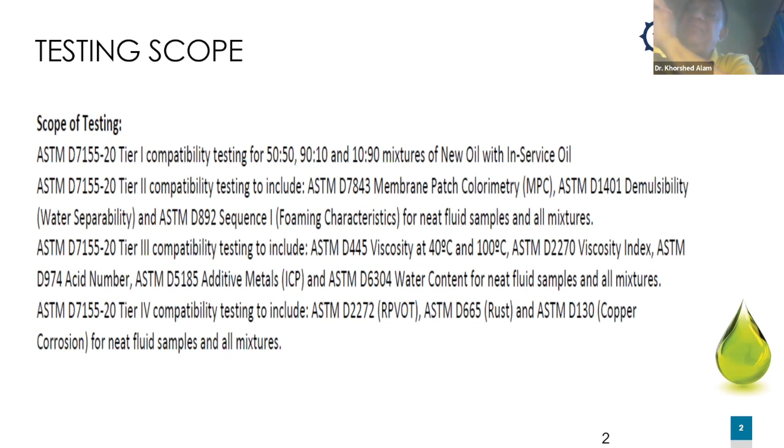When you talk about compatibility, another thing comes in: what is the ratio like? One lube oil with another, is it 50-50, 90-10 or 10-90? You could do 70-30 or 30-70, but the standard ones are 50-50, 90-10, 10-90. One tells you how a little addition behaves, the other how half behaves. For each test we did these ratios for new and in-service oil, and you'll see what we tested in subsequent slides.

So let me put it up front: at what level of compatibility do you want to test? Should the scrutiny be the highest, or just bearable, acceptable? So we need different tier levels. If you go up to tier 1 testing, you'll get one answer. Then do you want to go further, tier 2, 3, 4, 5? Different characteristics come in, and we see compatibility against those. So let's talk about tier 1.

So tier 1, when you do this compatibility test, and then how you do it, the preparation, just like any other, even a university lab, where I also came from. So you have the processing of your sample, right? So how you do it. One is by heating, then we do some kind of test. Another one will be by incubation, keeping it for some time, and then do the test. And do the test again, 50-50, 90-10, and 10-90.

So here I'm talking about tier 1, after heating, 50-50 ratio. And you can see what we check here, the sediment after heating, how does it look like? So green, as you see, is no sediment, and then very slight sediment, heavy sediment, and appreciably more sediment than 3. So these are the 1, 2, 3, 4. Those kinds of index are often used in compatibility, be it in fuel oil or in lube oil. In fuel oil also there is a compatibility kit, and we use a similar thing, 1, 2, 3, 4, 5 kind of range, right? So 0 to 4.

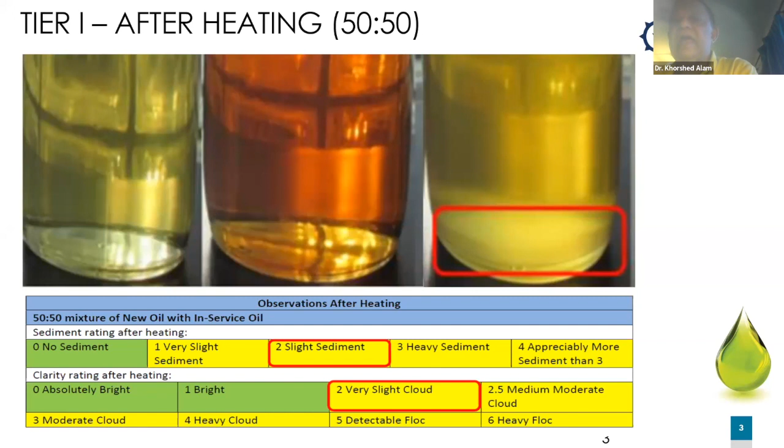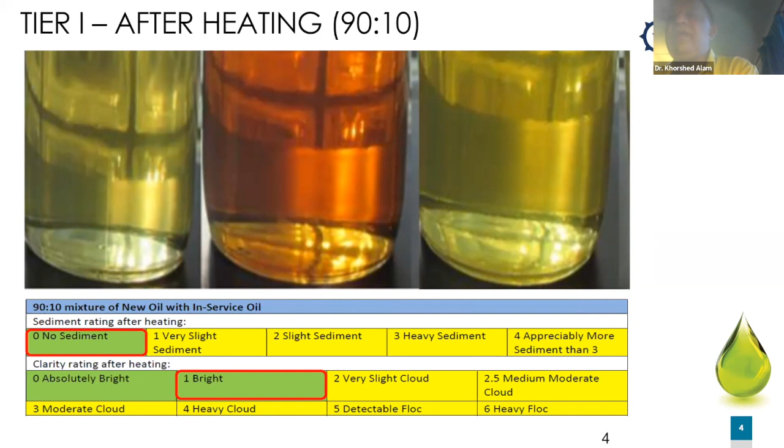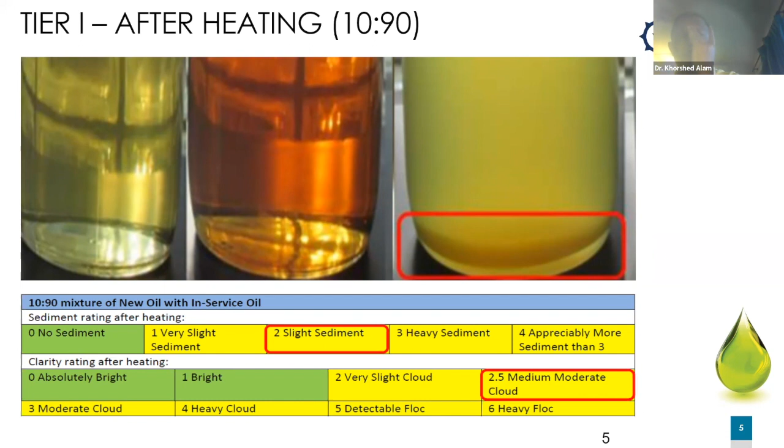Then let's change the ratio for the same oil again, 90-10. And in this case, we found no sediment, and clarity-wise it is bright, right? And go for 10-90. And then again, sediment is slight sediment, and clarity is medium or moderate cloud. It's a 2.5 rather. It's not even 3. So this is tier 1 you have seen after heating.

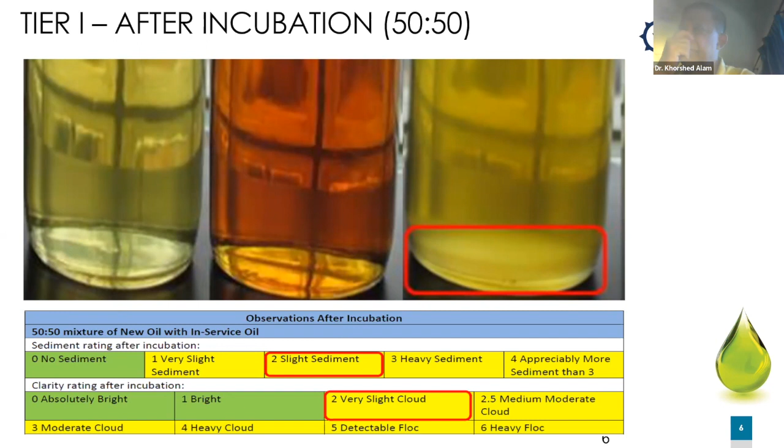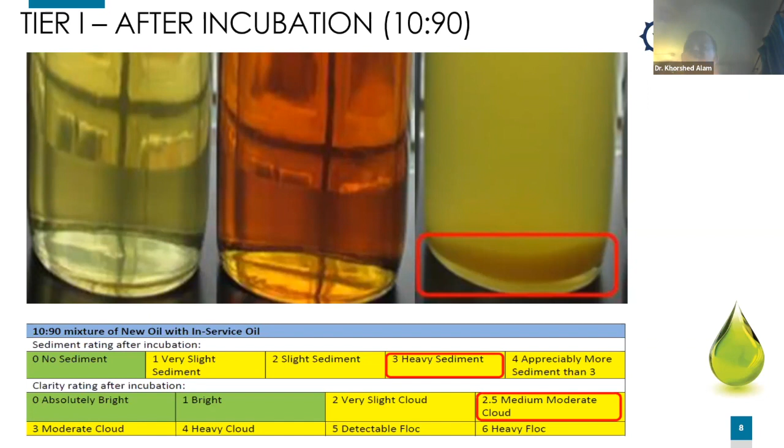Now again, let me summarize. Tier 1 we have done after heating, and we looked at the sediment and the clarity at different ratios, 50-50, 90-10, and 10-90. Then you want to do the test again with regard to compatibility, with other test methods like membrane patch colorimetry, ASTM 7843, and new oil; there are similar indexes. And you can see the ratios 50-50, 90-10, 10-90, and how the result looks. The result is given as pass, fail, and not applicable, or not attainable.

Again, you can see demulsibility. I don't want to go through each and every one of it, but you can see the membrane patch colorimetry, then you have demulsibility, you have foam sequence and all these things, different ASTM standards, new oil, different ratios, and what the result looks like. And at the end, the decision is: is it pass or fail with regard to compatibility, right?

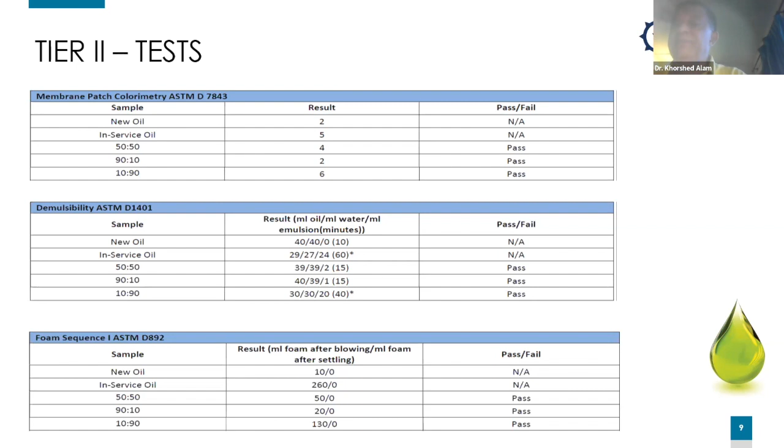Tier 3 goes further up, and then you see, okay, viscosity at 40 degrees Celsius, viscosity at 100 degrees Celsius, how does it look like? And viscosity index, the different ASTM standards you follow. And then you have the acid number, all this. And then even phosphorus level, water content, similar thing you do following different ASTM standards, and the result that comes out will constitute whether it is pass or fail, right?

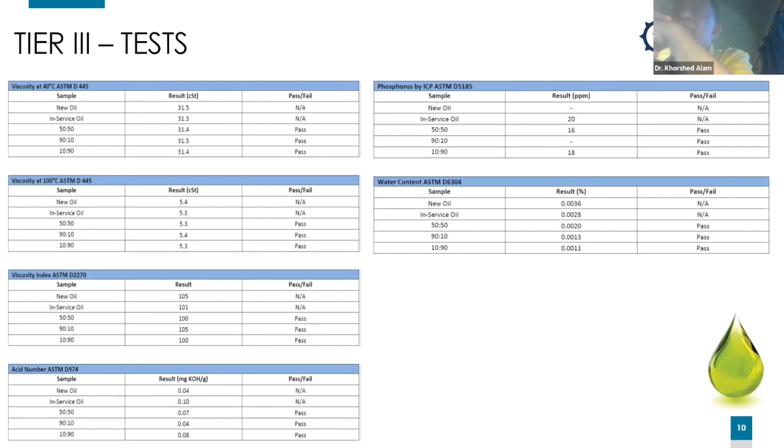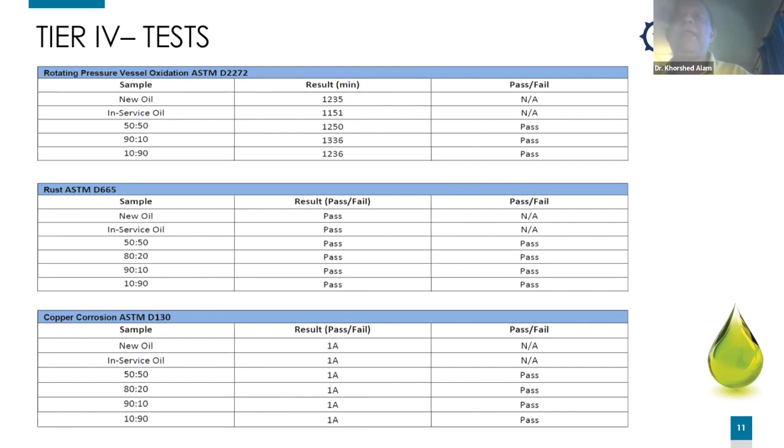Again, in addition, you can do further tests at tier 4 level, and that is the rotating pressure vessel oxidation, the rust, the copper corrosion, all those. And similar thing again, the results come out, some in minutes, some as pass or fail. And at the end, the tier 4 test. So we have done this for a couple of clients, and we found at the end the result is this: new oil and in-service oil mixture, as you have seen slide by slide.

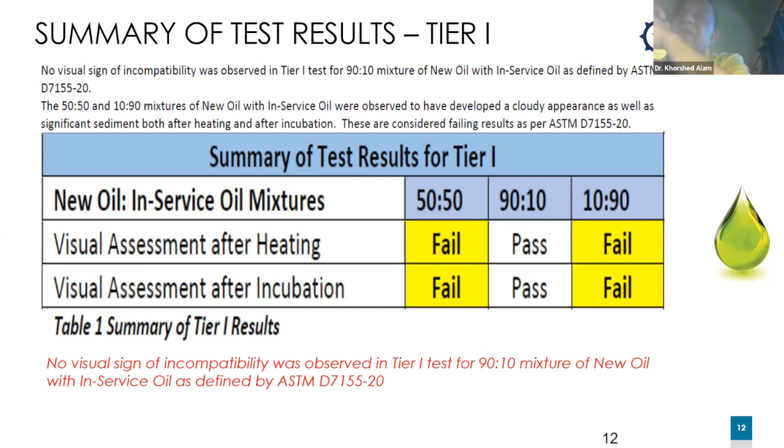So the visual assessment after heating for tier 1: 50-50 failed, 90-10 passed, 10-90 failed, and after incubation again fail, pass, fail. So no visual sign of incompatibility was observed in the tier 1 test for 90-10 of the new oil with in-service oil, as defined by this ASTM standard. But 50-50 failed, 10-90 failed, 90-10 didn't fail with regard to the tier 1 standard.

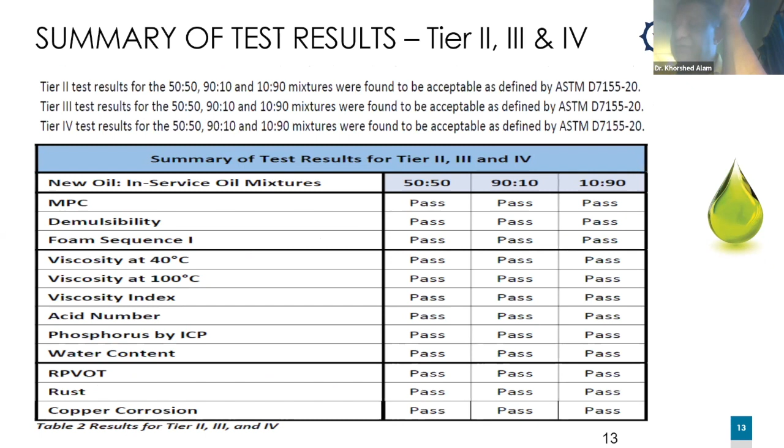And with regard to tier 2, 3, and 4, as you can see on the left-hand side, again it was done at different ratios, right? Demulsibility, foam sequence, viscosity at different temperatures, acid number, phosphorus, water, rust, and all those things, whether pass or fail. But as you can see, all of them actually pass, right? So more or less, I leave it here. And this is, as I said, to generate interest in today's discussion.

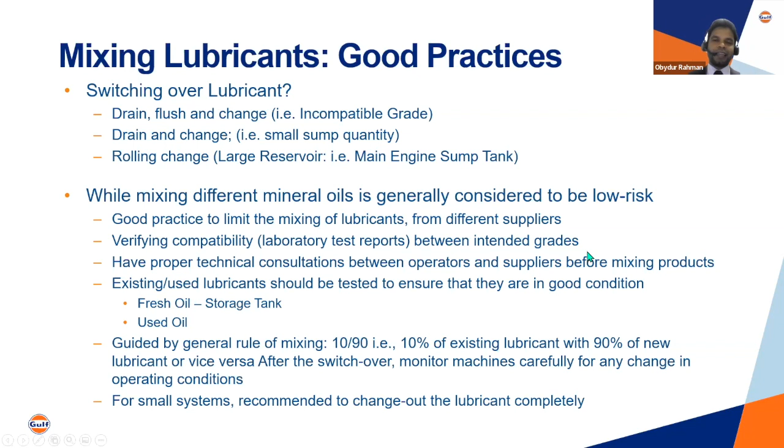As Dr. Alam said, other than marine engine oil, other grades are quite negligible. If we consider onboard oil consumption, almost 85% is taken by the main engine and auxiliary engine. The remaining 15% is scattered across all other equipment. It can be stern tube, air compressor, air conditioning, deck machinery or cranes, all these things. So apart from mineral oil, for synthetic or other grades, we do not recommend mixing any synthetic oil. We can do the test ourselves, but it will not be acceptable to other parties.

For mineral oil, although it may be subjective, there is still industrial practice guided by ASTM, guided by CIMAC, and also acceptable to the customer, because just for changing oil, they do not want to throw away all the dollars and cents. But synthetic grades are used in maybe a few liters per equipment. So it's easy to change and commercially not a problem. So industrial practice is that synthetic oil shouldn't be mixed, and in line with industrial practice we also recommend that synthetic oil shouldn't be mixed.

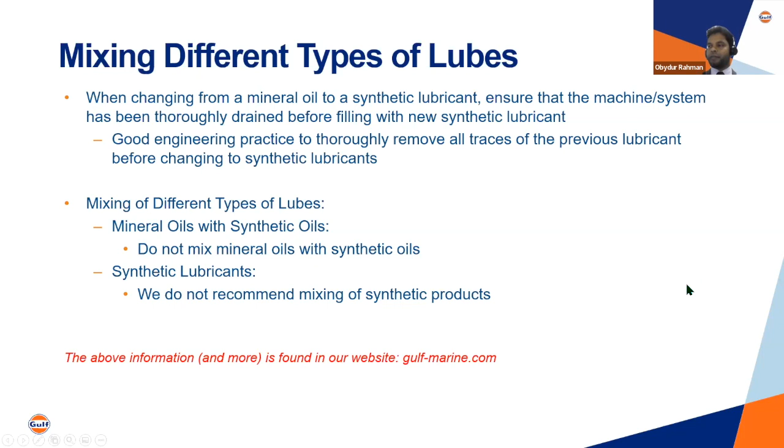And of course, other than that, the chief engineer needs to monitor all this, especially since we are talking about lubricants and especially mixing. During this period, the chief engineer, our onboard engineer, needs to closely look at the engine operating parameters to ensure that there is no issue with lubricant compatibility. Yep, that's my slide.